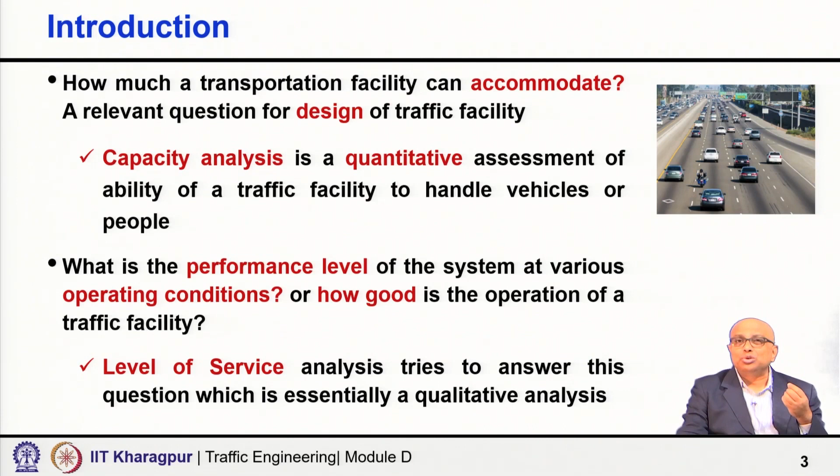So those are the two topics: capacity and level of service. Capacity provides a quantitative assessment of the ability of a traffic facility to handle vehicles or persons, and level of service tries to answer the question of how good is the operation of a traffic facility.

Now, traffic stream is composed of a variety of traffic modes. We have mostly motorized modes like cars, light and heavy commercial vehicles, sometimes recreational vehicles, buses, motorcycles, and country to country, if you come to India, the traffic is highly heterogeneous even within the segment of motorized vehicles. These vehicles do not all have the same characteristics. Over and above, you have non-motorized modes, for example pedestrians and bicycles. So that makes the whole traffic stream heterogeneous in nature.

Now, these modes operate on a variety of roadway system elements, for example points, which could be intersections; segments, which are the lengths between intersections; facilities, which include both points and segments; then corridors, parallel freeway or arterial facilities; and also, at larger geographical scales, areas and systems. So one way is vehicle type, the other way is roadway system elements, at which level we are doing the analysis. Both are very important when we are talking about capacity and level of service.

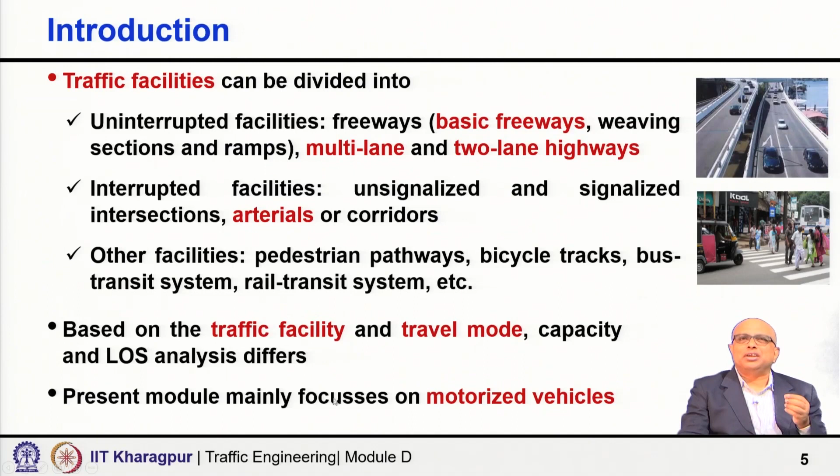Based on the traffic facility and travel mode, both are important, as I have said. What kind of facilities, uninterrupted or interrupted, what kind of elements we are talking about, whether points, segments or facilities, the capacity and level of service analysis differs, and it is practically not possible to cover all types of facilities, all elements, and all vehicle types, both motorized and non-motorized. So present module, from this point onwards, we will grossly restrict our discussion to motorized vehicles.

Coming now to the concept of capacity, the definition, more importantly the formal definition, is very important, because every word in this definition is meaningful. Let me read it out.

Capacity represents the maximum sustainable hourly flow rate at which persons or vehicles reasonably can be expected to traverse. So the reasonable expectancy is very important, and it is the basis for defining the capacity.

Traverse a point or a uniform segment, with homogeneity within the segment. The segment must be uniform in prevailing control condition; roadway and control condition does not change within that segment of a lane or roadway during a given time period, under prevailing roadway, environmental, traffic, and control conditions.

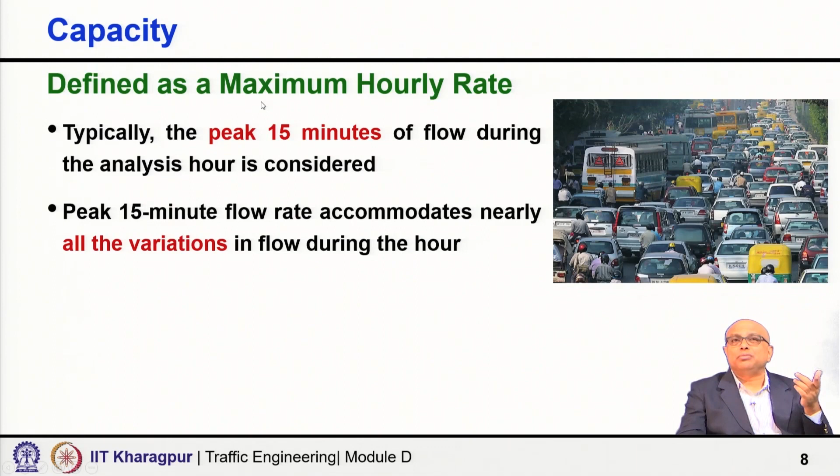If you take too short an interval, suppose if I take 1 minute or 2 minutes, I may get a very high flow rate which will be absurd, which we cannot get again and again. So the duration is again very important, and we express it in terms of maximum hourly rate.

Second, it is expressed in terms of persons or vehicles. So capacity may be expressed in terms of persons or in terms of vehicles. Often we express it in terms of vehicles, because ultimately the road is getting loaded with vehicles, so we use concepts like passenger car equivalency or passenger car unit. But person capacity is also sometimes important, particularly when evaluating public transit service, because that is what will matter, or for high occupancy vehicle lanes and even pedestrian facilities.

And in all these cases, it is assumed that there is no influence from downstream traffic operations, such as a queue backing into the analysis point. That means downstream there is no chaos that is going to influence the flow at the upstream point - that kind of influence is outside the influence area where we are doing the measurements and talking about capacity.

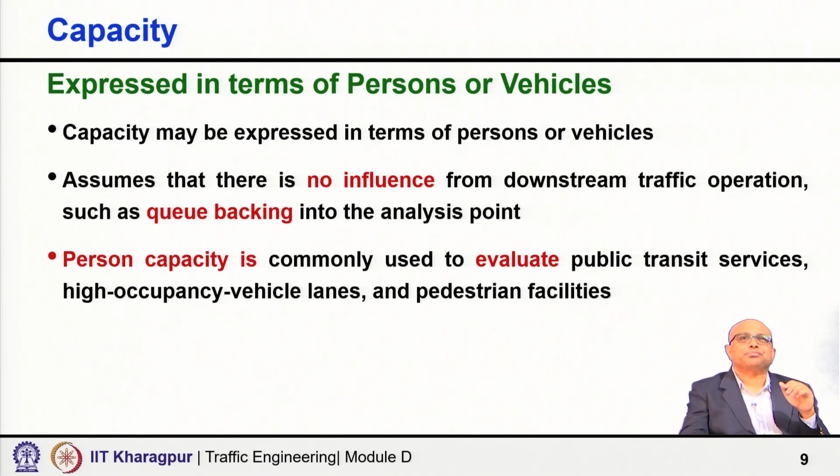Next, capacity is defined for a point or uniform section, and also for prevailing conditions. That means once you take a section, that is the condition, that is the prevailing condition, and for that we are getting a capacity value. Therefore the uniform section concept is important, because we are actually defining or quantifying capacity for a section which is uniform. It has a prevailing condition, and that prevailing condition is different from an adjacent section - and if it is different, capacity should be defined separately for the two sections, because those sections are not uniform.

So capacity is at a point or for a uniform section, under prevailing conditions. If the prevailing condition changes, your uniformity is also questioned, and the change in prevailing condition will mean that the capacity will be different. So segments with different prevailing conditions will have different capacities.

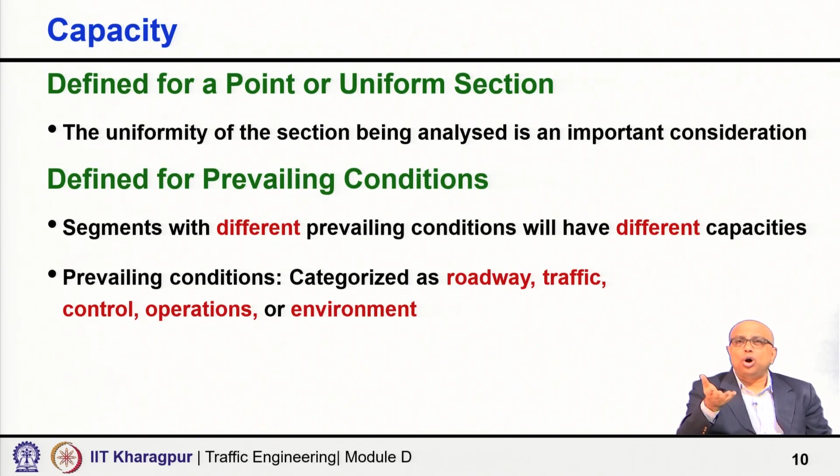Prevailing condition may be characterized based on roadway, traffic, control, operation or environment. Let us see each of these. Roadway condition - what do we mean by roadway? Actually, roadway conditions include geometric and other elements. For example, how many lanes are there? If the number of lanes is changing, the capacity is going to be different. Also the type of the system element, its use, and the land use environment - very important.

A road passing through an area where nothing is there on both sides, completely vacant land, versus passing through an area where both sides are developed with people walking and activities happening - side friction is very high, and the capacity values are going to be different.

Lane width - if the standard lane width is not maintained, if the lane is narrow for some reason, we will lose capacity, we will not get that much value. Shoulder width, lateral clearance - every element is important. Design speed, horizontal and vertical alignment, availability of exclusive turn lanes at intersections - all these will define the roadway condition. And if the roadway condition changes from one place to another, capacity is also going to be different.

Coming to traffic conditions - a variety of vehicular traffic, motorized traffic, is on the road.

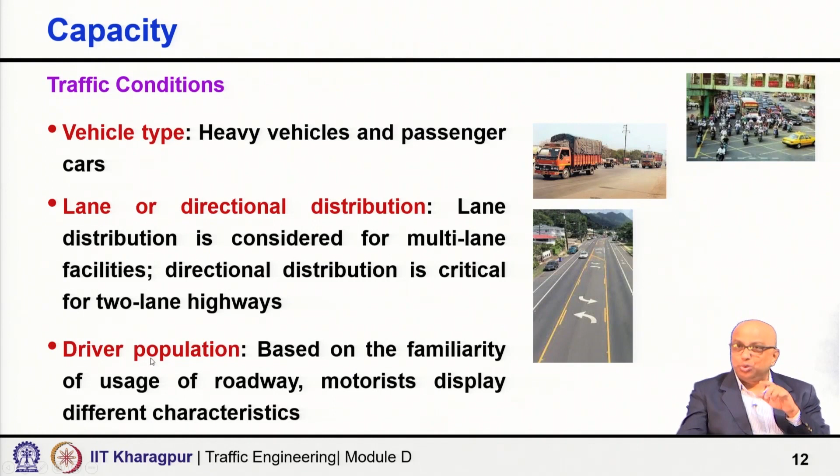Then the driver population: how familiar drivers are with the road environment. Are they regular drivers, say public transport, traveling that route every day, familiar with the road elements and environment? Based on their familiarity with the roadway, motorists display different characteristics, so driver population familiarity is very important and influences capacity.

Control condition: the most critical type of control is the traffic signal—signal phasing, allocation of green time, cycle length, and every component of traffic signal control, along with its relationship to adjacent control measures, all affect operations. Other controls such as stop signs, yield signs, parking restrictions, or restrictions on certain turns also matter.

So the capacity concept and its influencing factors are many, and overall the capacity concept is much more complex. It is not like the capacity of a box or a bucket, which you can define very easily.

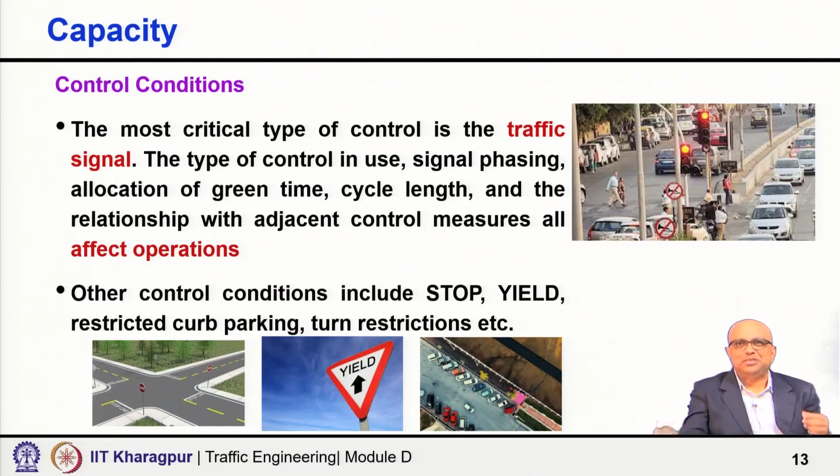Technology and operation: technological strategies, commonly known as Intelligent Transportation System strategies (ITS strategies), aim to increase the safety and performance of roadways. Any technology that allows drivers and traffic control system operators to gather and use real-time information, since traffic states change randomly, to improve vehicle navigation and roadway system control, will also influence overall operation and capacity.

Last but not least is the environmental condition. A facility's capacity can be temporarily reduced by environmental conditions—for example, heavy rain, adverse lighting conditions, or slippery road surfaces—all of which may influence road capacity.

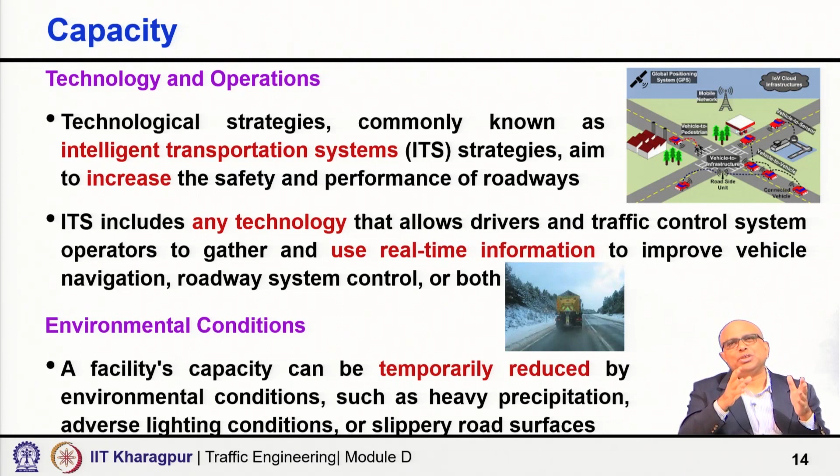Another very important thing is the base conditions. We shall primarily focus on Highway Capacity Manual 2016, which is based on the often-used concept of base conditions. Most values are given for base conditions, while prevailing conditions will be different. The base condition is somewhat like an idealized condition, whereas the actual prevailing condition will not be that idealized.

Wherever they deviate, appropriate corrections are to be applied. We will discuss multiple such corrections in subsequent lectures when we talk about two-lane roads or multi-lane roads, and the capacity and level of service (LOS) analysis. We will elaborate further at that time.

The base condition assumes things like good weather, good and dry pavement condition, and users familiar with the system elements. It assumes no impediments to traffic flow in every sense—no trucks or heavy vehicles in the stream, no lane narrowing, ideal shoulder width, ideal traffic lane width—everything standard as per the standard.

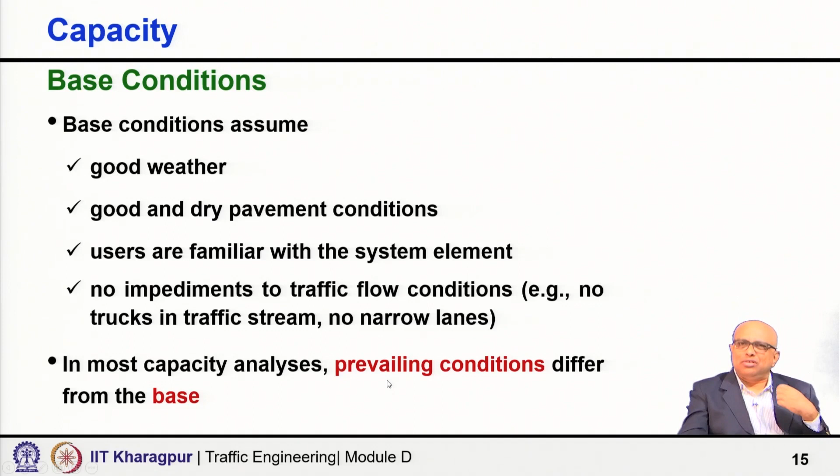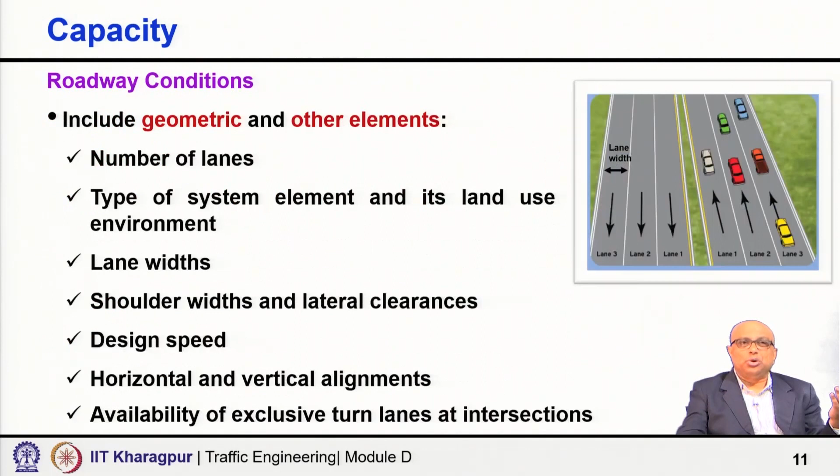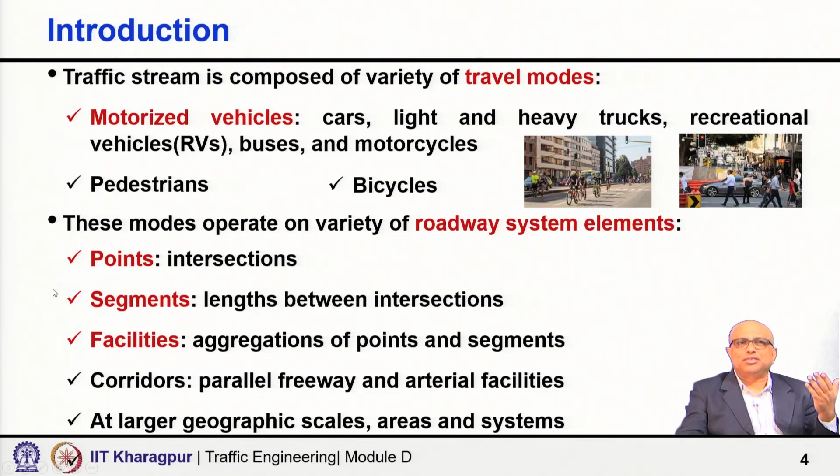Going now to the quality of service concepts, or level of service. First, quality of service describes how well a transportation facility or service operates from the perspective of travelers. We are all travelers, traveling on roads. How we feel, how good the system is working, whether we are talking about an intersection or an overall corridor—different elements are there—so how well or badly they are working, as in point, segment, and facility.

Level of service is a quantitative stratification. The basic concept of quality of service and level of service is qualitative, but it is also a quantitative stratification of performance measures. When we group them into levels of service, we use some measures on a quantitative basis. Those measures are basically performance measures, or measures of effectiveness, which actually represent the quality of service. So LOS is a quantitative stratification of a performance measure or measures representing quality of service.

The LOS concept facilitates the presentation of results through the use of an A to F scale. A is the best, LOS A is the best, and LOS F is the worst. So level of service is defined into six segments: A, B, C, D, E, F. A is the best, F is the worst. On what basis are we defining A, B, C, D, E, F? It is based on this performance measure or measures.

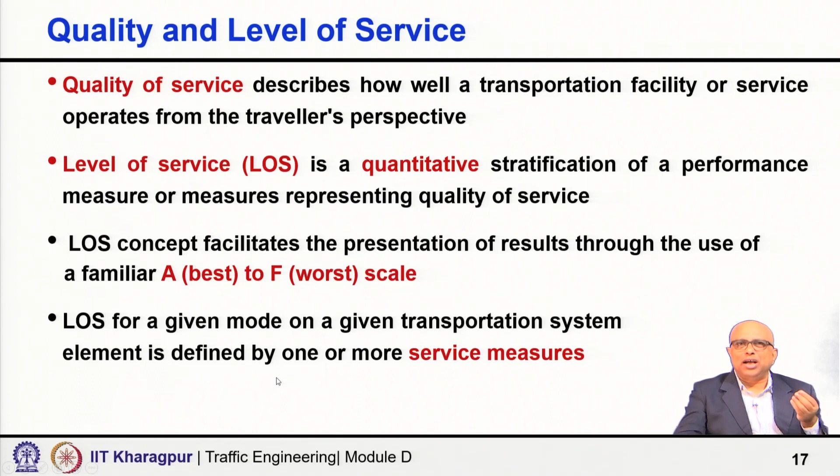That is what I have said. LOS for a given mode on a given transportation system element is defined by one or more service measures. Quality of service can be assessed in many ways, probably in combination. One way is by directly observing factors perceivable by and important to travelers—for example, speed or delay. Travelers can perceive this directly, and what is the perception of users, how much importance they attach to this aspect? When talking about a transportation system, it may not be only speed, but multiple other things too.

Second, by tracking complaints and compliments about roadway conditions—how you get feedback. What is the problem? Are lots of people saying the road condition is very bad and that they face congestion every time, or are they giving compliments about the roadway condition? That could also be used in some form or other.

Third, surveying travelers—directly go and survey travelers, intercept travelers, take responses from them using a well-designed questionnaire. Forecasting traveler satisfaction by using models derived from past traveler surveys—you might have already collected such data, many such works are being done. I also do similar works, using stated preference and revealed preference data analysis. You can develop models and even forecast using those models once they are properly calibrated.

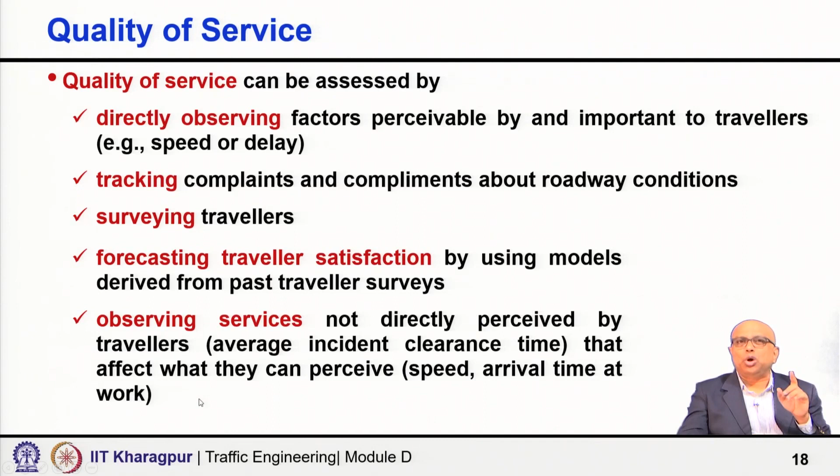There are several factors affecting the quality of service. I have mentioned some of them here, say travel time, speed, delay, very relevant. Number of stops incurred, how many times a vehicle had to stop.

What is the travel time reliability? Not only what is the travel time, but what is the travel time reliability. Then what is the level of maneuverability? For example, ease of lane changing, percentage of time spent following other vehicles because you are in a queue and you are not getting to perform an overtaking maneuver, you are forced to follow another vehicle. So how much percentage of time you are forced to follow other vehicles.

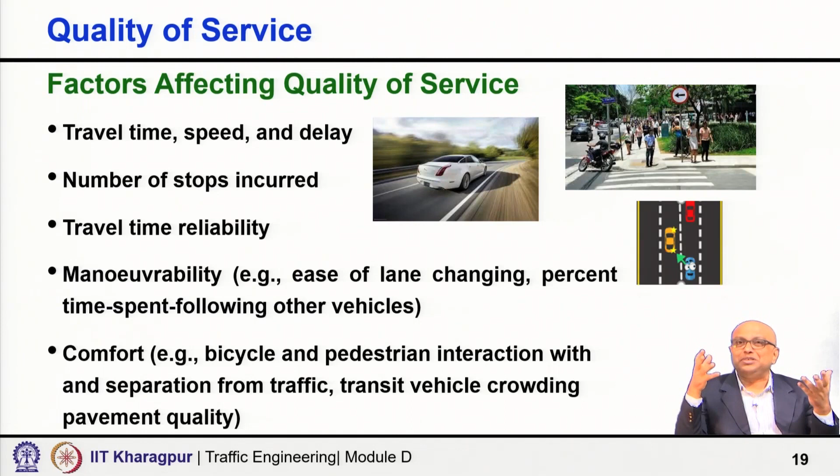Comfort, for example, bicycle and pedestrian interaction and separation from traffic, transit vehicle crowding, pavement quality, all such kinds of things, these are all qualitative. Overall comfort of travel is influenced by all such factors.

Convenience, directness of the route, frequency of transit service. You can directly travel from point A to point B, or you have to transfer twice to reach the destination. Safety, what is the actual performance, or what is the perceived, both are important.

User cost, higher the user cost, less will be the attraction. Ability or availability of facilities and services, facility aesthetics, how they overall look, information availability.

Am I able to get the information about the transit route, schedule, planned one or scheduled one, or the real time? Whether the appropriate signage is there to direct me to the transit station or ticket counter, or to various other facilities, whether they are present or not.

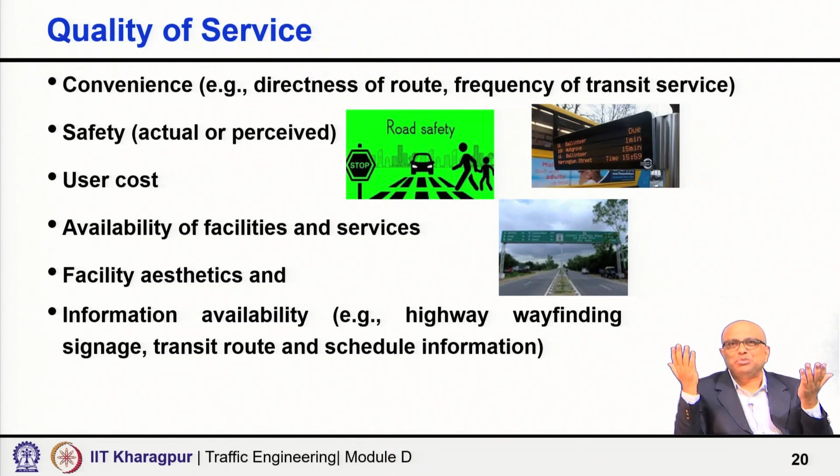So many things could be there, and not that for every user all these things are important. To some segment of users something may be important. Maybe for vehicle users something is important, but the transit users specifically their considerations may be different. A bicycle user's perception and requirements and important factors may be different, and a pedestrian's again could be different. All these are possible.

So overall we can say LOS is a quantitative stratification of a performance measure or measures representing the quality of service. I have told it earlier, repeating it once again, and measures used to determine the LOS, the quantitative basis is a quantitative stratification. On what basis, who is doing that quantitative stratification?

It is the service measures. Based on the value of the service measures, we are deciding whether it will be LOS A or LOS B or LOS C.

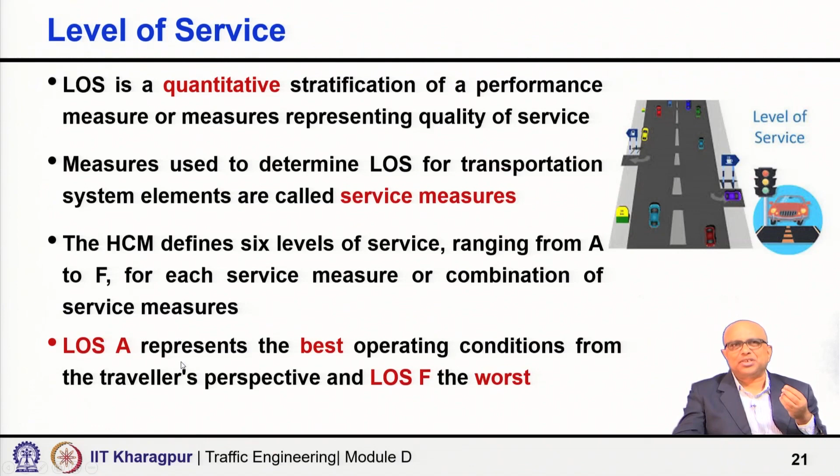Highway Capacity Manual defines 6 levels of service, as I said, ranging from A to F, and for each service measure or combination of service measures, LOS A represents the best operating condition and LOS F is the worst.

LOS F defines operations that have either broken down, that means already you know the forced flow conditions. So often the LOS F is actually the forced flow condition, or which have reached a point that most users would consider extremely unsatisfactory for a specified service measure value or combination of service measure values.

For cost, environmental impact and other reasons, roadways are typically designed not to provide LOS A conditions during peak periods, but instead to provide some kind of lower LOS that balances individual travelers' desires against society's desire and financial resources.

This is again, if my expectation is very high, so to meet the same demand, I need more infrastructure, but infrastructure you can only build by spending society's scarce resources.

So everywhere in the peak hour, if I expect the best operating conditions, highest level of freedom with level of service A, I probably need much wider roads, many additional lanes, which may satisfy my requirement and give me more satisfaction as a road user, but then I am actually using society's scarce and financial resources, which is always limited.

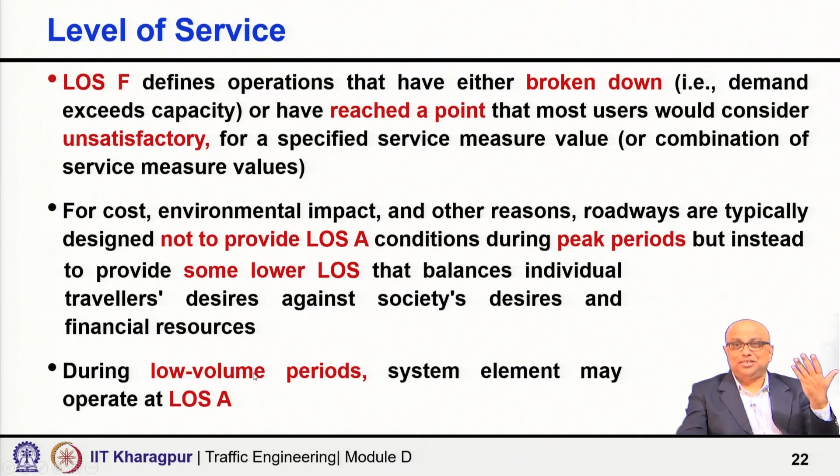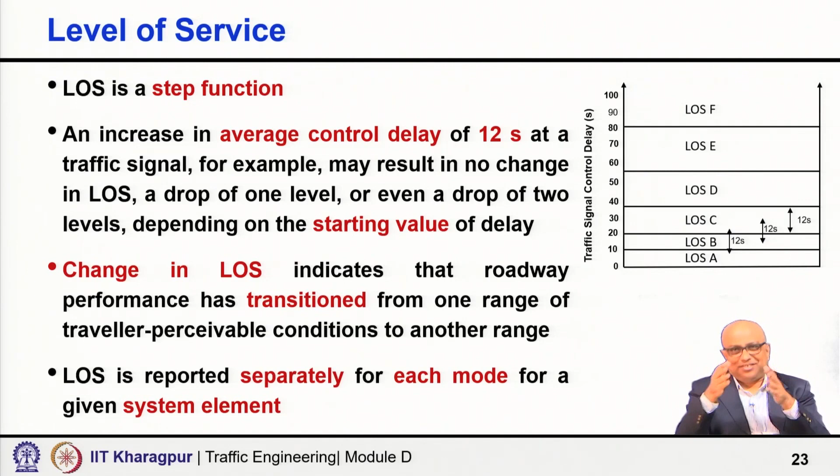LOS is also reported separately system element to system element, because the functionality and the objective that different facilities are supposed to serve is different—an expressway or access-controlled road and a local road or arterial are not going to serve the same purpose. So even element-wise, type of road or type of facility-wise, it will be different.

Service measures: travelers of different modes have different perspectives and could experience different conditions while traveling along a given roadway. The same roadway used by different road users of different modes may have different impressions about the facility. It may happen that one mode of users finds it very good, but another kind of mode user finds it very bad. So one may perceive or experience LOS B, while road users of another mode may experience LOS D.

Service measures, therefore, are also different for different modes and also for different facilities.

Let us take an example: for an urban street facility segment, for motorized vehicles it is the through vehicle travel speed. For pedestrians, it may be a combination of the pedestrian's experience walking along street links between signalized intersections, crossing the side street at signalized intersections, and also crossing streets between signalized intersections. This influences the measures likely to affect the LOS as perceived by pedestrians, but for motorized vehicles it is considered differently—through vehicle travel speed, not the same.

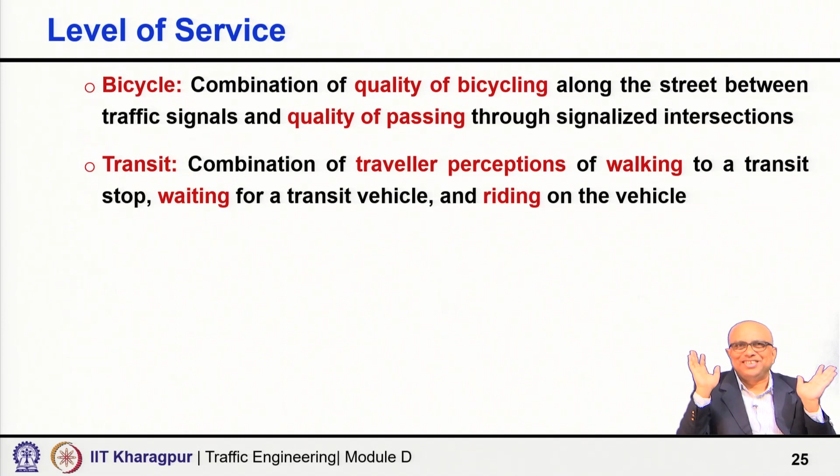So you can see, even for the same element, different mode users have different requirements and different expectations, and therefore the measures used to define the LOS—the quantitative basis provided to define the LOS—this basis itself is different.

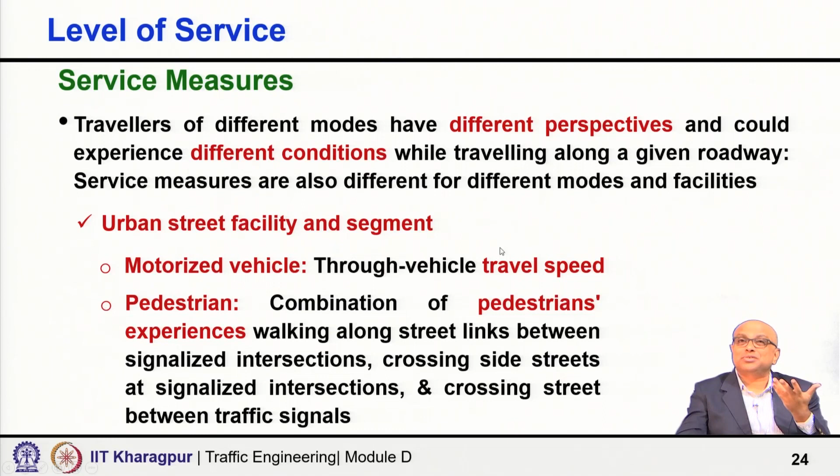So altogether, what we discussed today is the importance of capacity and LOS analysis for different modes and facilities, how these things will differ, the concept of capacity, the prevailing conditions and base conditions, quality of service and what the influencing factors are, and the concept of level of service and different service measures considering different mode users.